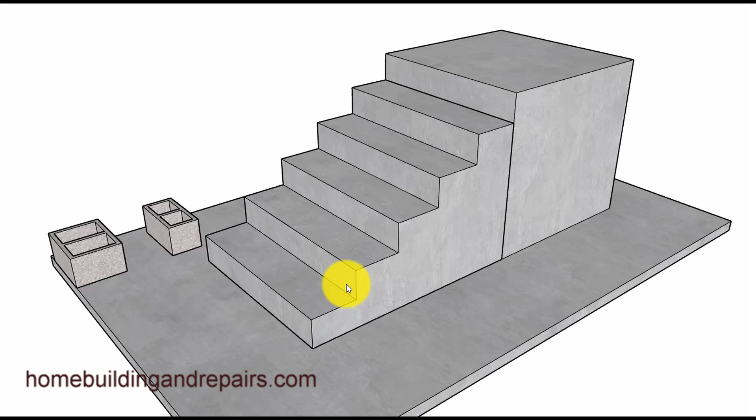In this video, I am going to show you why I would choose building a set of stairs out of concrete instead of concrete masonry units or concrete blocks like these. Now keep in mind that concrete blocks come in different sizes.

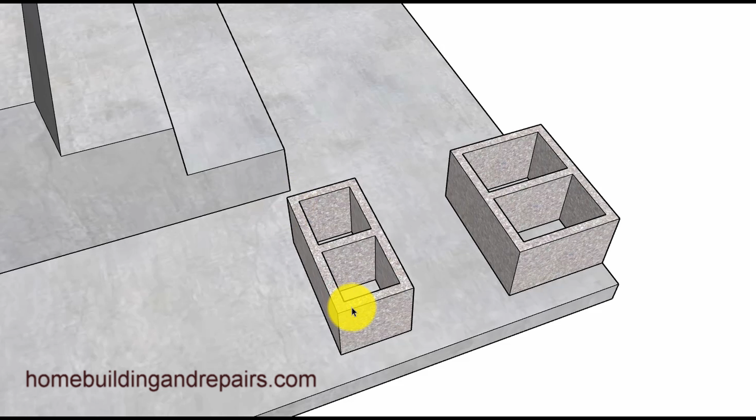However, I'm going to be using the most common one, which is about 8 inches wide by 8 inches tall and 16 inches long. And basically they're 3/8 of an inch shorter than the measurements I just gave you. However, you would need to check with your local building supply warehouse or concrete block supplier for more information about that.

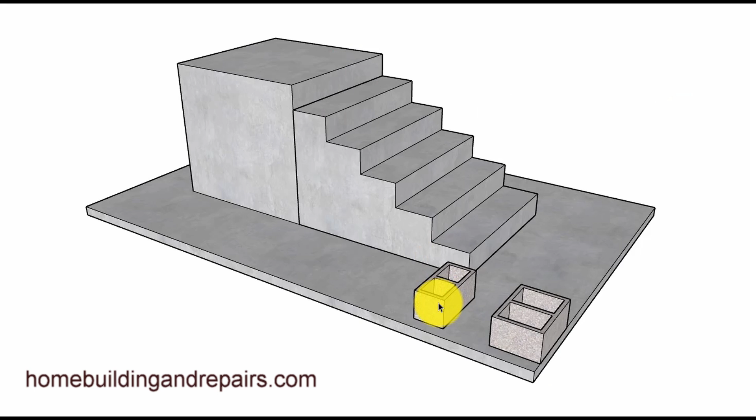Now, for those of you who just want a quick answer, it's basically going to be easier to form up a set of stairs and then pour the concrete instead of using the block, because the block will need to be cut and shaped to fit the rise. Unless, for example, you have a stairway that is going to be the exact same size as your concrete block, or I should say the riser and even the tread width, then you might not need to cut as many blocks.

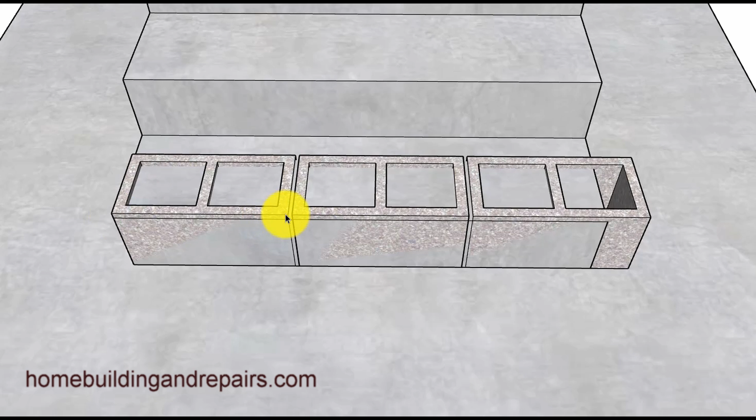And in our example here, our stairway is 44 inches wide with an 11-inch deep stair tread and a 7-inch tall riser. And since our blocks are going to be 7 5/8 of an inch tall and 7 5/8 of an inch wide and 15 5/8 of an inch long, then it's not too difficult to suggest that they will need to be cut.

So in this example here, we needed to cut the blocks down to 7 inches tall, and that would be for all 3 of these blocks. Then we would need to reduce the size of the blocks on the end to create this type of shape. And then of course you could fill the blocks up with concrete, and I've seen this done before. However, I wouldn't advise doing it because it could create a trip hazard. It's going to be much better to have a smooth surface like this one here.

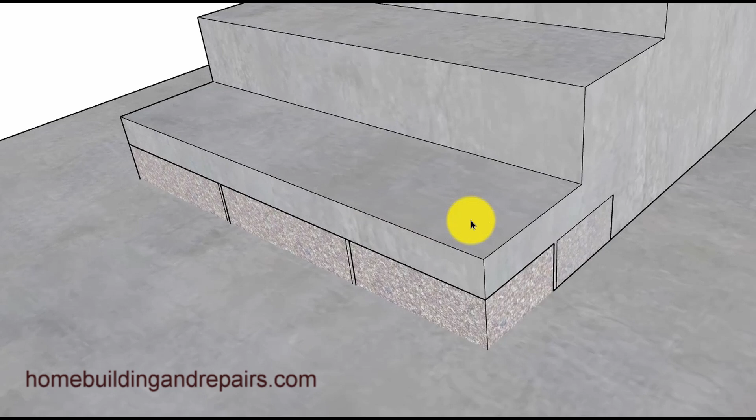And for those of you suggesting that, hey, why not rotate the blocks 90 degrees and then use this surface here? I don't have a problem with that if that's going to work for you. However, you would need to keep in mind that this part of the block would now be in the front and might be difficult to fill with concrete. However, you could always lower the block so that you could put some type of concrete tread on the top. And with this design, you might be able to extend the front of the tread about 1 inch to produce a nosing.

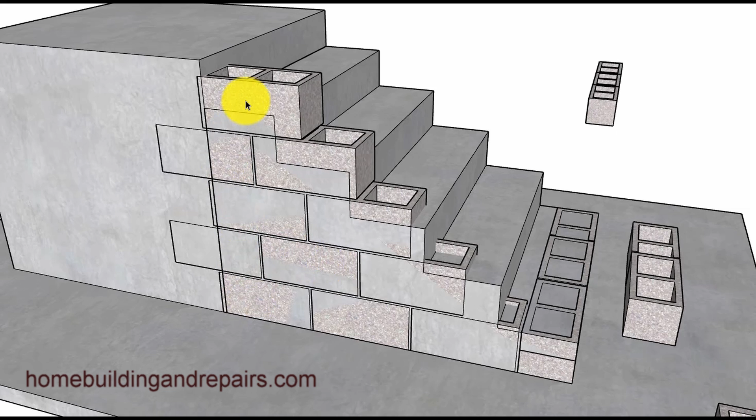Now let's get back to how many cuts you're going to need to make in the rest of the blocks to build a stairway like this. And I can basically tell you that in this design here, these are the only 2 blocks that you won't be cutting. Other than that, every other block in the stairway is going to need to be cut. And you can see here where I left the complete blocks in here along with the top of the tread and the risers to provide you with an outline of what you're going to need to do to produce this stairway.

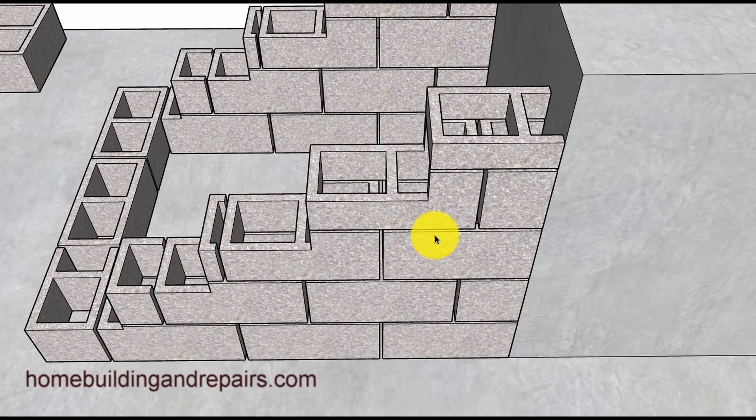And again, I don't want to suggest that this is a stairway that you're not going to be able to build, because if this is something that you're more comfortable with, then knock yourself out. Why not use it? It might be something that another family member or friend can build easier or help you with. And if that's the case, then why not do it?

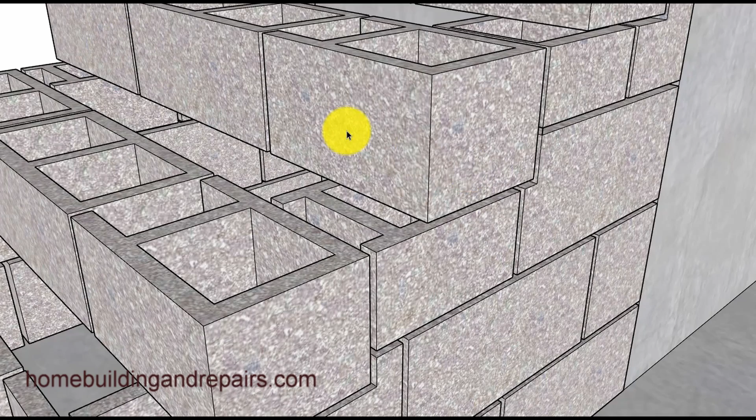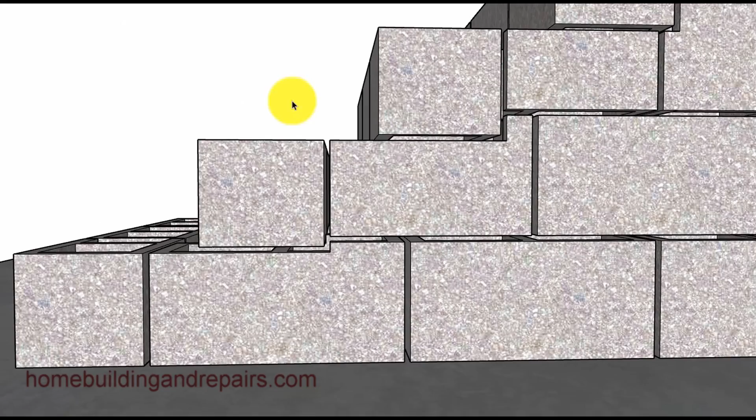Next up, let's go ahead and run a row of bricks in the front here for our risers and create another design here. And again, we're dealing with 2 blocks that are going to need to be cut. However, this design seems to look a little bit better, and in my opinion, definitely better. And since it's going to require about the same cuts, then this might be something that will work better for you also.

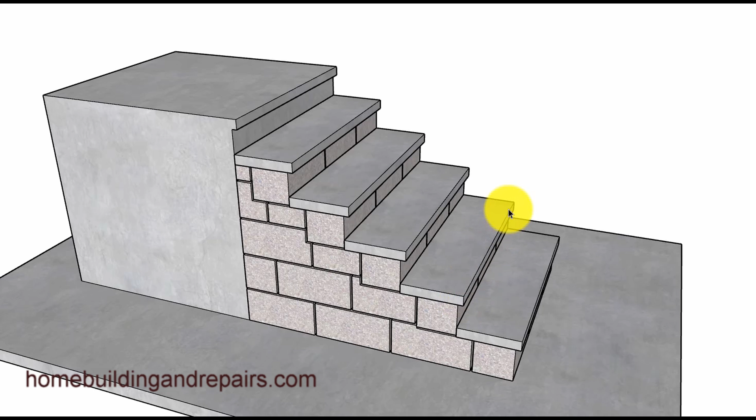And instead of filling up the blocks with concrete, I would suggest using some type of concrete tread like this to produce a smooth surface for your steps. And these treads can also be attached with mortar or some type of an adhesive. And this design actually looks nice. However, I don't think this would be as easy to build as a stairway formed and then poured with solid concrete. So I will end the video right here.